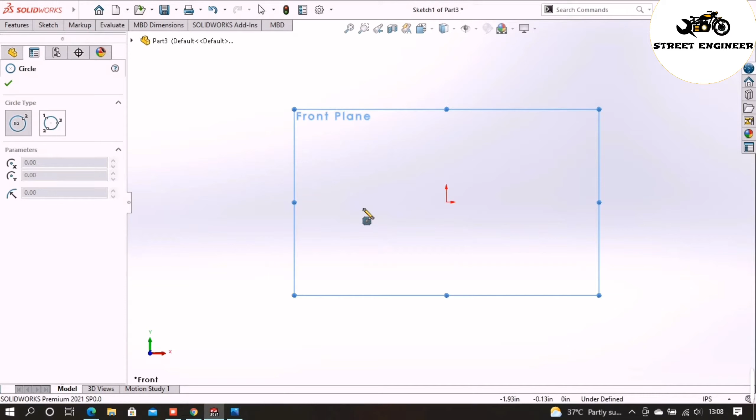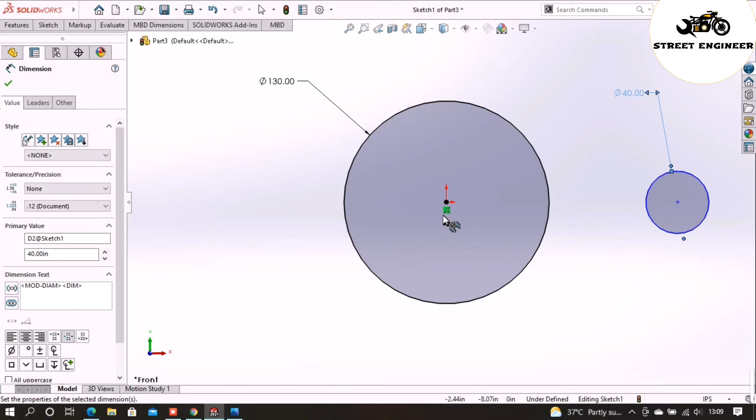Open part design, go to sketch and select circle and draw two circles. And go to smart dimension. The circle radius is 65, so diameter 130, and the circle diameter is 40. Now this first circle center to this circle center is 250.

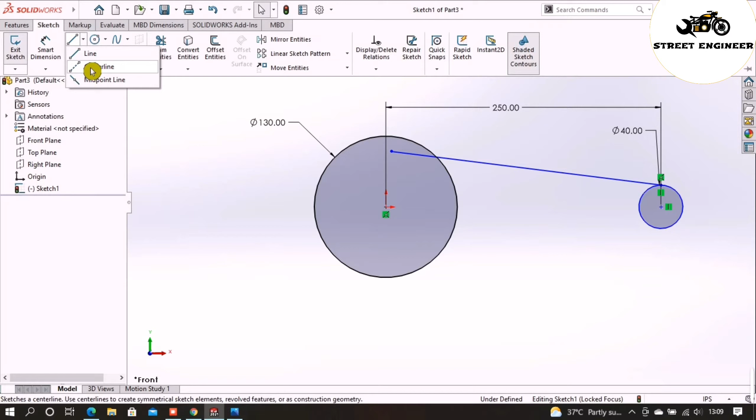Then select the line tool and draw a tangent line like this. And to stop a line loop, just double click the mouse. And go to line tool and select a center axis line and draw an axis line. And go to trim and cut this part.

Then go to fillet and select sketch fillet and select these two lines and enter 50 in property menu. Then this part will become curve.

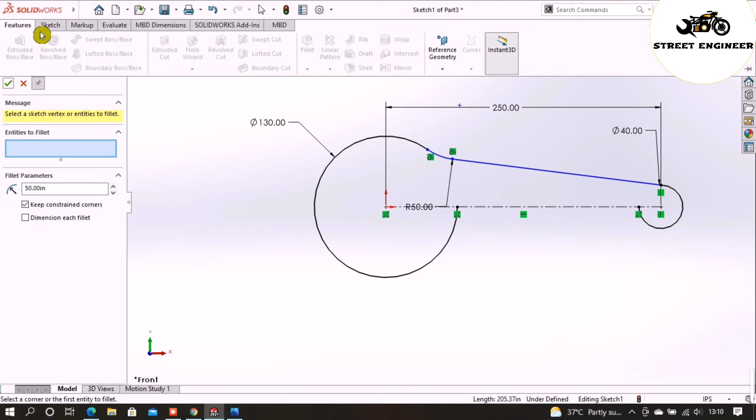Now go to sketch and select mirror tool and click on these two entities to mirror, and then click on the mirror about in property menu and select axis line, then the line will mirror automatically. Then go to smart dimension and select both the lines and give angle 8.

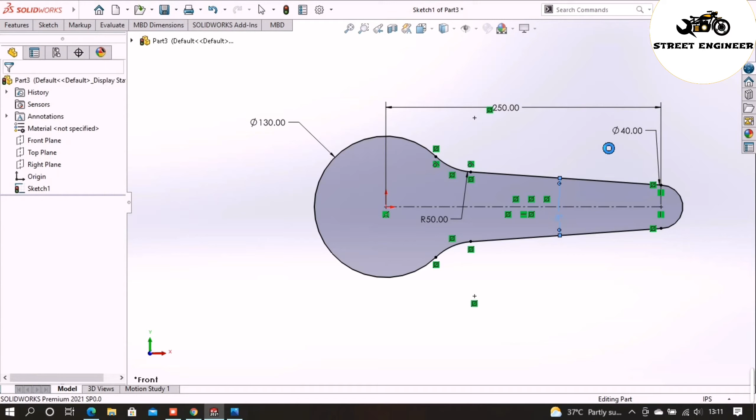This base thickness is 20. So go to feature and select extrude and click on this design. Now enter 20 in property menu. So guys, we completed the first step. Now let's see what to do next.

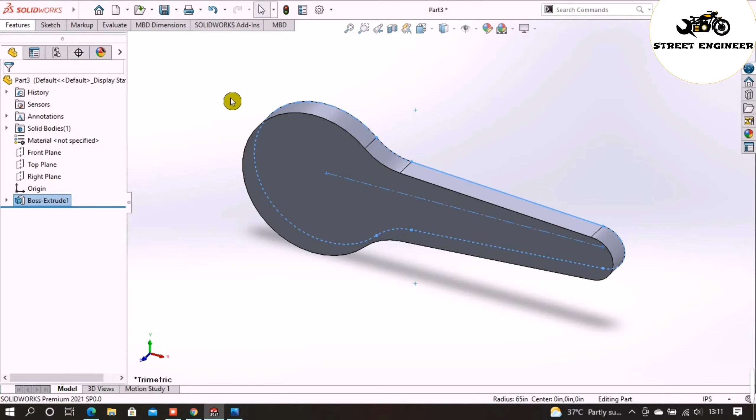Now I will design this part. This first diameter is 50 and this corner circle diameter is 25. So click on orientation icon and select normal to and click on the design and select sketch tool. Then go to circle.

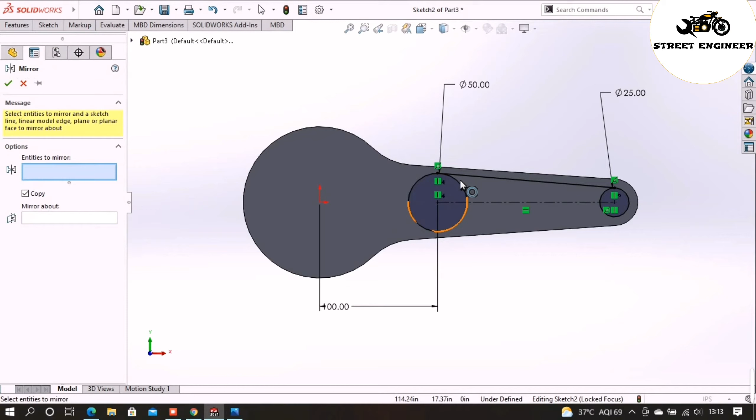Then draw a center axis line. Then go to sketch and select mirror tool. Now click on mirror entities and select this line and click mirror about from property menu and select center axis line. Then the line will be mirrored.

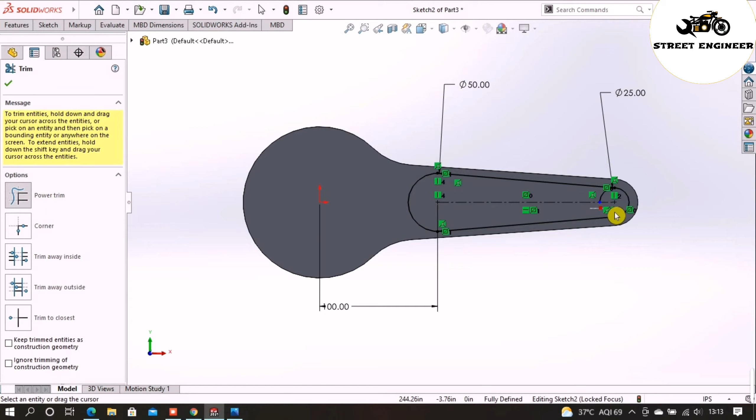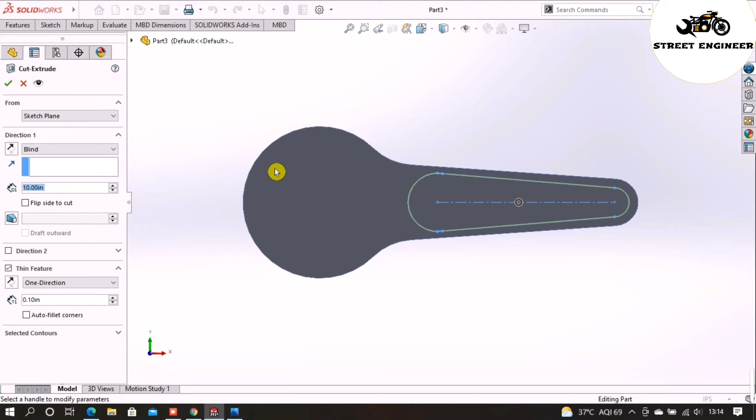This depth value is 10. So go to feature and select extrude cut and select this part. Then enter 10 in property menu. As you can see, I have completed this part.

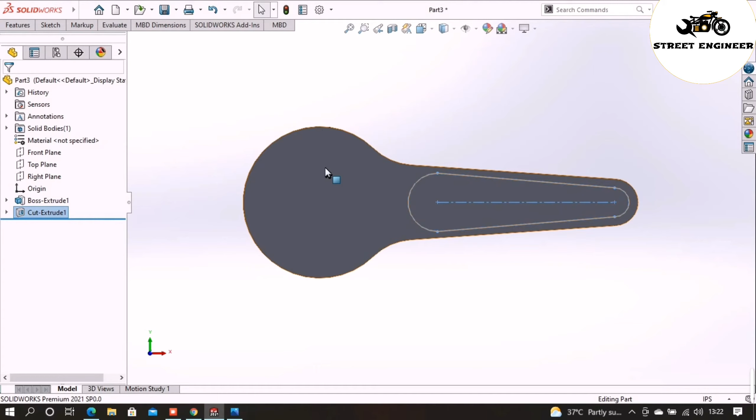So now I will design this circle of 100 diameter. Then I will extrude 80. Press Ctrl plus 8, then click on this design and select sketch. Then go to circle tool and draw a circle from this midpoint and give dimension 100.

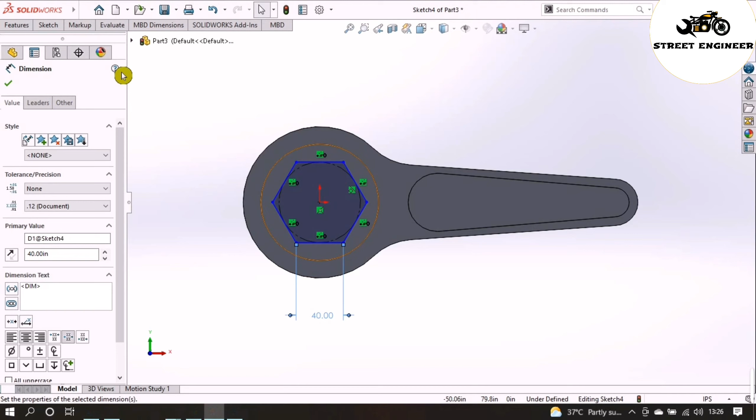Now go to feature and select extrude and enter 75 in property menu. Then press enter. Now you can see I have completed this design.

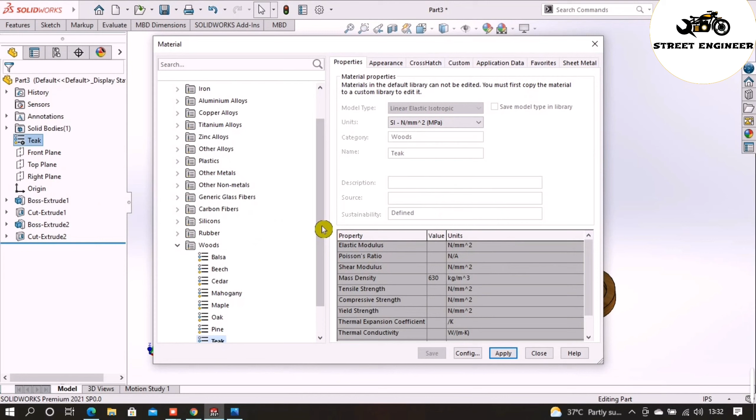So guys, I have designed this wrench tool.